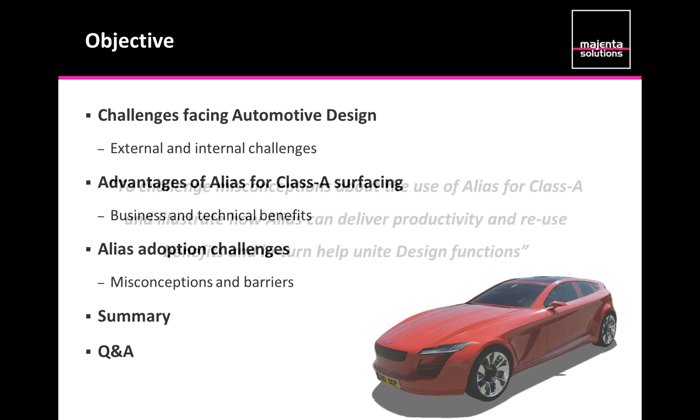So the agenda is going to cover some of the challenges we face in automotive design, both internal and external, and the advantages of using Alias for Class A, not just technical but business benefits as well. We'll also consider some challenges in adopting Alias for Class A, looking at misconceptions and potential barriers, then summarize and take questions. I have about 30 slides in total, and the presentation will last approximately 30 to 40 minutes.

So let's start with looking at these challenges that face design. The external challenges include, in terms of the marketplace, a rapidly expanding market. The BRIC countries bring with them a different challenge for design, the different voice of customer requirements that these marketplaces demand.

The customer is changing. They demand high quality niche products, and with that, with the need for an extended product range comes an increased demand for engineering to order.

And finally, the business itself is changing. Globalization has had a significant impact on automotive OEMs. We now have globally distributed teams with design functions placed worldwide on different time zones with different influences. So that's the external challenges facing design.

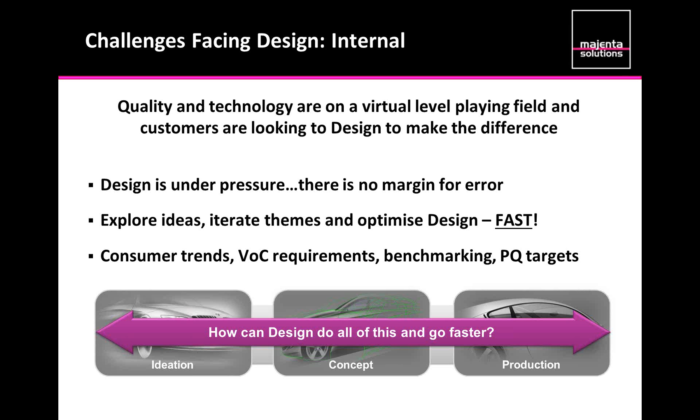Well, that's what we're going to look at over the course of the next few slides. So let's look at the current landscape in terms of CAD and visualization products that support the design development process.

The overall development process really can be divided into three key stages: the definition of the proportion and stance before a program starts, design finding or theme investigation during the conceptual phase, and through to the maturation of the design into production design and onto surface transfer or surface release.

Autodesk Alias is the de facto standard for concept design, and ICEM Surf is the legacy solution for Class A. In terms of the visualization pipeline, it's supported by products such as RTT DeltaGen, VRED, BunkSpeed, Showcase, Maya, and 3ds Max.

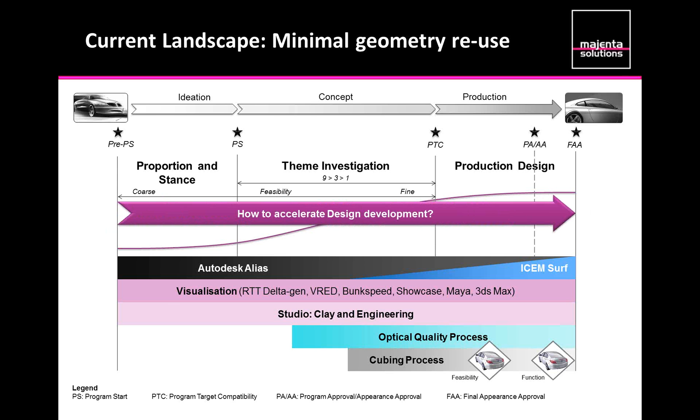So again, the question is, how can we accelerate this process? How would this look tomorrow if we were to utilize Autodesk products to deliver seamless design development? Well, as I'm going to pitch today in this presentation, we can actually use Alias for concept or creative design and production design, so we get a joined up solution for design surface modeling.

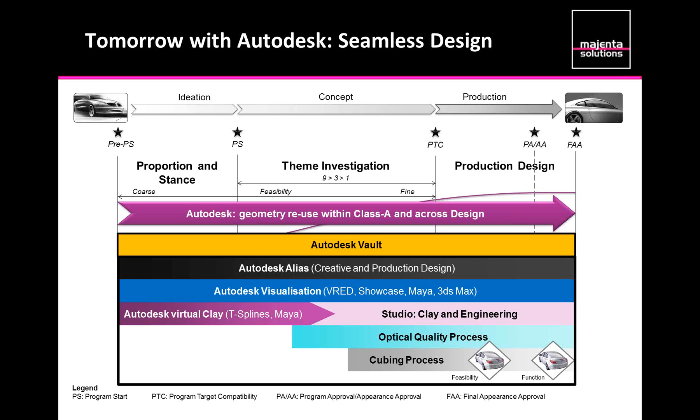Autodesk offers its new acquisition of VRED for a holistic visualization pipeline. In terms of supporting the studio, Autodesk has T-splines and Maya virtual clay tools, or subdivisional modeling tools. And all of the 2D and 3D visual assets generated during the design process can be captured using Autodesk Vault. All of that means we can help reuse geometry within Class A and across design to accelerate the process. So let's look at that in more detail.

So what are the business benefits of using Alias for Class A? Well, I think the primary business benefit is improved productivity, and we get that through being able to leverage geometry reuse within Class A. But how do we do that? What does Alias offer us to deliver geometry reuse?

At the heart of Alias, as I'm sure a lot of people on this call are aware, is the concept of construction history. Construction history in Alias enables us to make changes and see those changes propagate through our model, effectively enabling us to reuse geometry within the Alias part file. But whilst this is really well understood and pretty much accepted within the concept modeling domain, actually this is a revolution within the Class A market space.

Typically, Class A modelers, when presented with change, have to delete and recreate their geometry. These workflows are synonymous with the legacy ICEM solution.

Not only do we leverage construction history in Alias, but Autodesk have taken these repetitive, manual construction techniques and rolled them into automated tools such as Panel Gap, as you see here, which helps optimize and refine design very quickly. Not only does the construction history enable us to effectively replay those tools, it also means that if we make changes to the volume surfaces or the curves that define some of these automated tools, everything updates. So this brings improved productivity and efficiency.

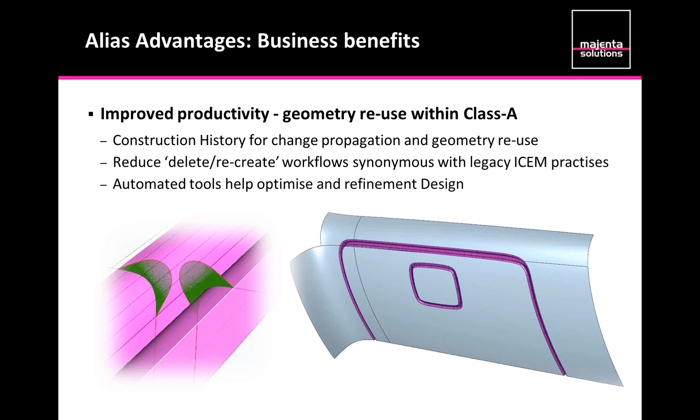If we were to consider using Alias for Class A, we then end up with a joined-up solution from concept through to production, enabling us to mature geometry from concept through to production. Again, this helps us remove or reduce this delete and recreate cycle, in this case between concept and production.

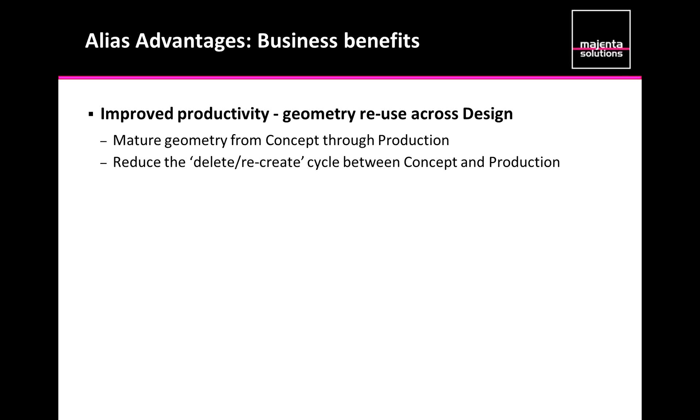Let's actually look at the market space as it exists today. For concept modeling, Autodesk is the de facto standard, and ICEM Surf is the legacy solution for production modeling. In both of these phases, because we're dealing with design, there's a lot of iteration. Change is synonymous with design.

The question is, if we were to move to Autodesk for production or Class A modeling, could we help join up these two functions and deliver seamless design development, and in turn reuse geometry to help accelerate the design development process? That's what I'm going to start looking at in more detail.

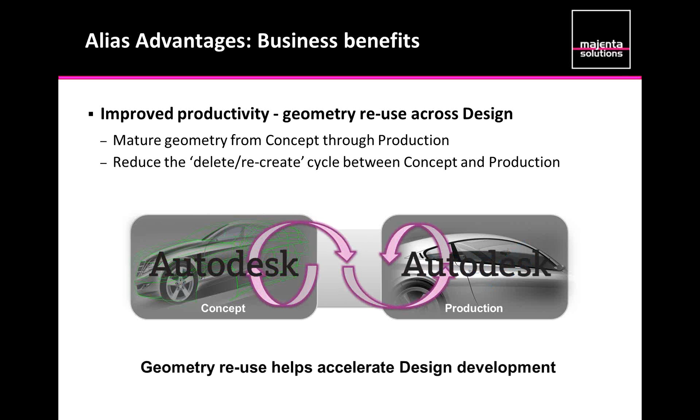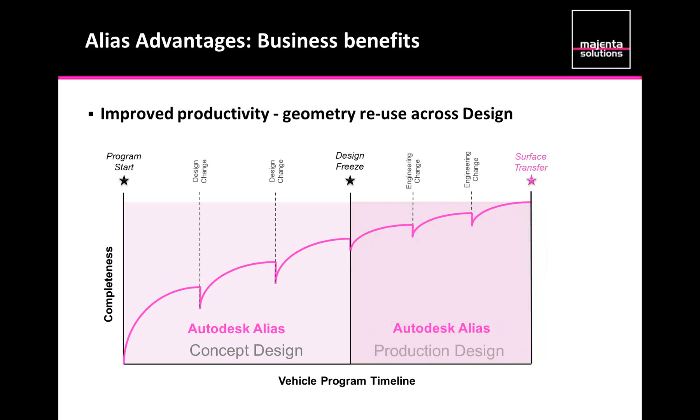But we still have a problem. We still don't get joined up design between concept and production, and that's evident in this graph. If, however, we consider using Alias for Class A, we then get a more joined up solution. The down spikes are reduced, and the vehicle program timeline can be accelerated further. So I'd like to substantiate this and actually look at what we mean by these different types of solutions.

So in terms of the business benefits, designers can easily communicate with digital sculptors if we use a joined up solution between concept and production design. There's no question that when a design moves from concept to production, the designer feels like they're losing control when the data moves to a tool that a designer is not familiar with. So if the designer can interact with the tool, and typically designers are very familiar with Alias, this helps them improve their communication and effectively preserve the design intent, which in turn accelerates the process.

Also, if we can leverage Alias across the design development program, what we end up with is effectively a resource pool that we can easily move around. It's flexible, and we can more easily manage program peaks and troughs.

Another challenge for managers in design is resource. As we know, the ICEM user base is actually diminishing. It's an aging user base. And Autodesk Alias, on the other hand, is very strong in terms of its resource capabilities. There's a whole pool of postgraduates leaving university every year with extensive Alias knowledge, hungry to be a part of the design process at automotive OEMs. And if we were to join up concept and production design and use a single system, with it comes reduced cost of ownership benefits, such as consolidating training and personnel costs, and also simplifying software maintenance and support.

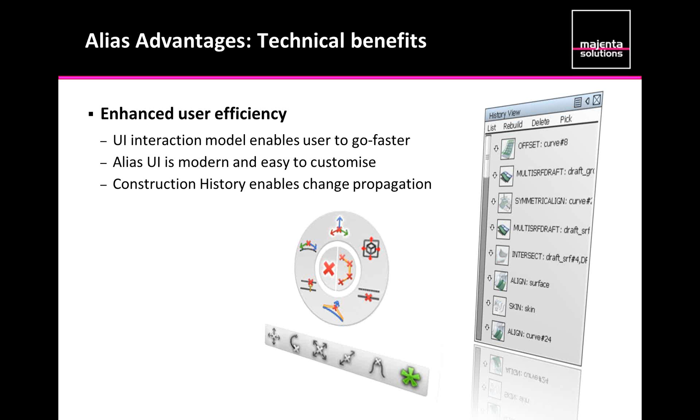So let's look in detail at the different types of systems that are out there and where Alias sits. I'm very conscious that these terminologies are used extensively in the industry: explicit modeling, feature-based modeling, constraint-based modeling. So let's look at how they sit with respect to the competitive landscape. So on the one hand, we have the legacy solution for Class A, ICEM Surf, which is an explicit modeler. ICEM is very good at what it does. It's almost exclusively Bezier in terms of the geometry it creates, but it has limited associativity. It's not really a constraint-based modeler, although you can, in Unified Modeler, apply some associativity.

I think the key advantage with ICEM Surf, and I've used ICEM Surf extensively for production surface modeling, is there is no question the high-quality Bezier algorithms are a real value add for ICEM Surf. But on the downside, some of the challenges are that actually managing change in ICEM Surf is time consuming, and we typically enter into these delete and recreate cycles.

It's often quicker just to delete geometry and recreate it than it is to try editing what's there. But that actually means we have limited geometry reuse capability in ICEM Surf. So on the other side of the coin are feature-based modelers, such as Dassault CATIA ICEM and Siemens NX Shape Studio. And these systems use something called linear timestamp history.

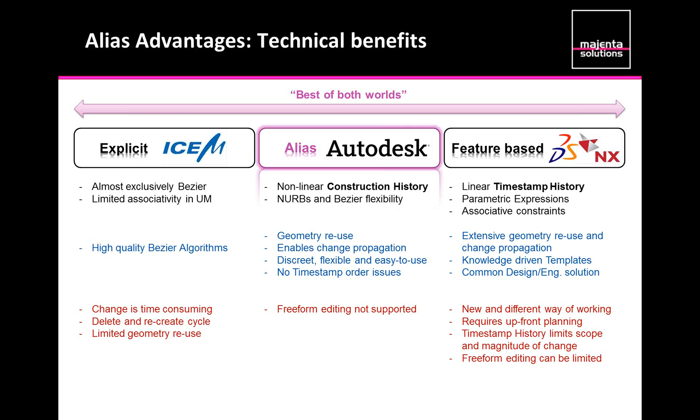So I think at this point we really should consider what we mean when I say the best of both worlds, Bezier and NURBS hybrid modeling. I think there's a lot of misconception about Alias with respect to NURBS and Bezier. So let's look at those two math types and what they mean to the geometry that we create. So Bezier is a very easy to control and predictable math. That's why it's very well suited to Class A modeling. However, on the downside, you often have to create multiple surfaces to capture complex forms, which means it can be slow.

NURBS, on the other hand, is really accurate and flexible and enables us to create complex forms fast because it effectively ties together the single segments of Bezier geometry into a multiple span solution. But on the downside, a challenge with NURBS is that it can be difficult to control and it can be unpredictable if the math becomes heavy. And I think this simple graph shows quite clearly the two key differences. Bezier on the one hand is easy to control, and NURBS, because of the flexibility, can be more difficult to control, but it is very flexible.

So what's actually the correct approach for Class A modeling in Alias? Well, I want to dispel myth number one. Alias creates Bezier geometry. And our approach for Class A is that we would use Bezier for the slabs or the blocks, for the surface transitions, for any blends and all gap conditions. In fact, everything that you model in Alias for Class A can be modeled in Bezier. Not only that, we give the user explicit control over the Bezier form, and that comes in the form of U and V control and also the degree.

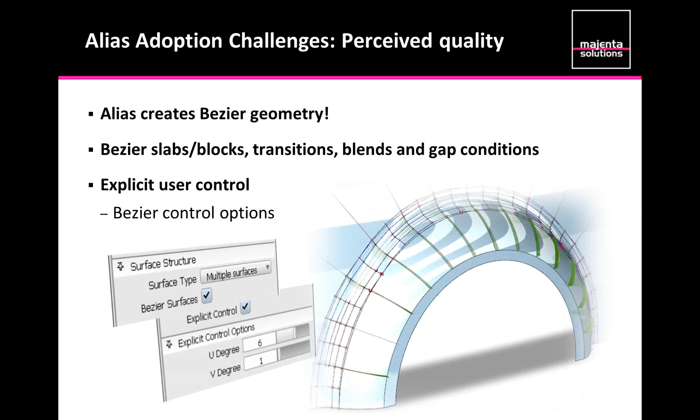But I would like to position to you a consideration for the use of NURBS in Class A. NURBS, and this is optional, NURBS could be used for design details, building on the Bezier quality from the blocks. For over 10 years, I've failed to understand why Class A surfacing modeling has failed to leverage NURBS for things like grey zone construction, where accuracy is paramount.

So NURBS is ideally suited for what I term auto-creation tools, or tools that really require minimal post-creation editing. Tools such as rolling ball radius, first flange and fillets, panel gaps, where accuracy is absolutely critical. This is an ideal application for NURBS.

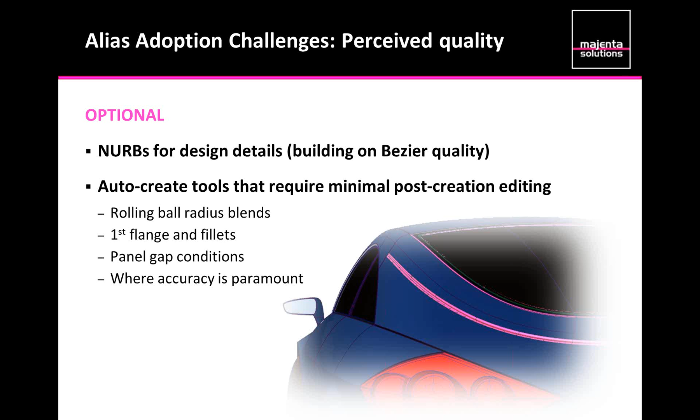Of course, the power with Alias with these tools is that because of construction history, if the user subsequently changed the volume surfaces or the curves that have been used to define these conditions, they will update. Anyway, let's look in detail at NURBS geometry and how the settings of NURBS impact or affect the surface quality.

As I've said, there is a huge misconception that NURBS doesn't create high-quality geometry. Well, actually, NURBS will give the user exactly what you ask of it. In this case, what appears to be a seemingly clean and smooth surface on a wheel arch eyebrow, if we actually put curvature needles on this surface to evaluate the quality, we can start to see that the graph is faceted, which is unacceptable for Class A.

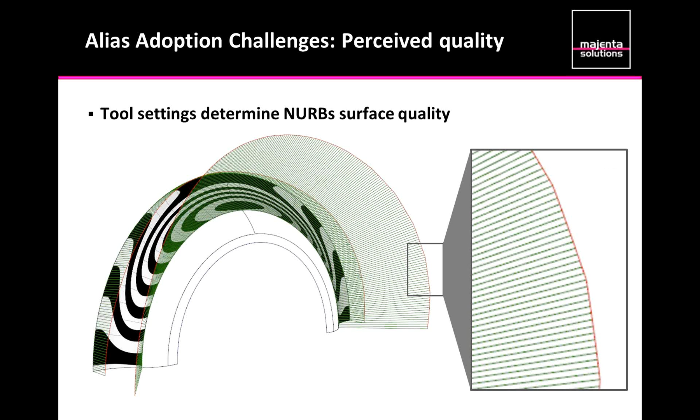However, this is exactly what I would expect with a NURBS surface generated as degree 3, because a degree 3 NURBS surface dictates that across the segments or the joins, the knots in this NURBS surface, we can only ever have curvature match, not curvature flow. So if we consider that same scenario using a degree 5 setting for NURBS, now the result can be completely clean and smooth across the boundary. And actually, Class A.

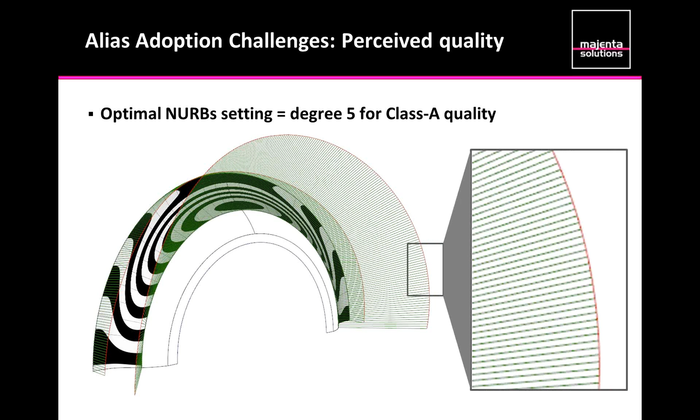So whilst we're tackling this issue of misconceptions, we cannot avoid the obvious question of the cultural challenges that we face deploying Alias into Class A. So let's look at the typical Alias users today in the industry. Alias is used for CAS modeling, or computer-aided styling, and a typical user persona for a CAS modeler is somebody who's creative and artistic. In fact, they usually come from an industrial design background.

They're industrial design educated. But importantly, the requirements of the CAS modeler are such that they really have to refine the design intent. They have to work with the designer and explore and iterate ideas. And they do still have some constraints. Of course, they have to satisfy studio engineering inputs, but they're very creative.

On the other side, in terms of Class A modeling with ICEM, the legacy solution, the Class A user looks and feels really quite different to a CAS modeler. In fact, by contrast, a Class A modeler is usually quite a precise and exacting persona. And often they come from a body engineering background or they're body engineering experts.

And the requirement on the Class A design is actually now to deliver the design intent. And this means not so much exploring, but more optimizing and refining the design. And they have to do that, importantly, with more constraints than the CAS modeler is used to having. This would include legal, manufacturing, and engineering criteria.

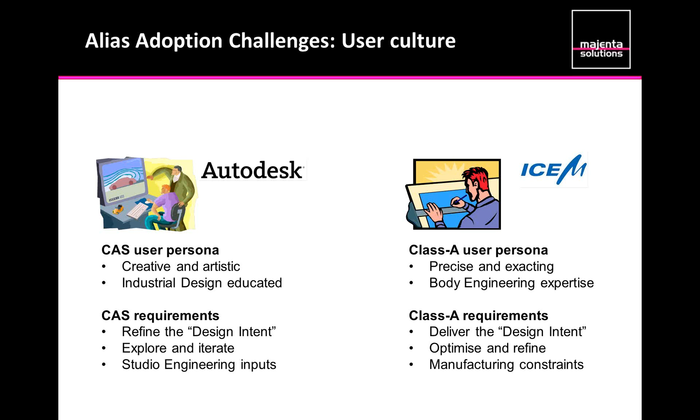And as we know, in the industry today, these two user profiles often have different perspectives, meaning that we kind of get this pseudo wall that exists within design between the two users. So the question I ask myself is, how can we break down this wall? How can we remove barriers within design?

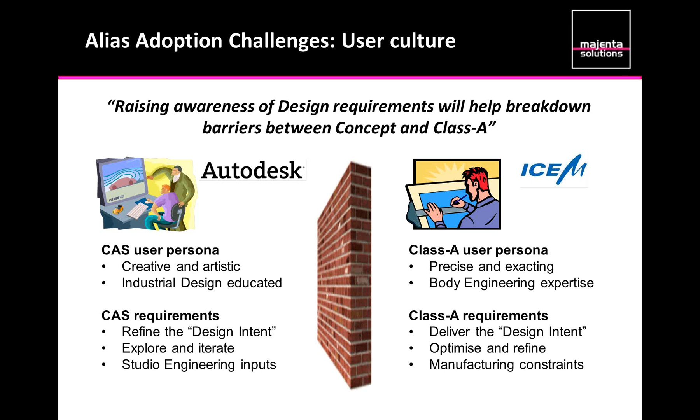And I think this can be achieved by raising awareness of the design requirements, the actual requirements that the users have, and also leveraging a tool that is joined up, that is seamless between concept and Class A. If we were to use Autodesk for Class A as well as concept, I think we can bring these two user personas together and have a more joined up, cohesive solution for design.

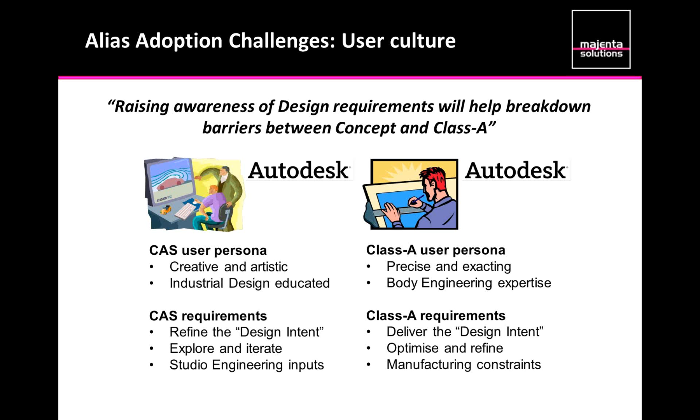So if we consider this now, what are actually some of the challenges in training Alias users from ICEM to Alias? Well, I think it's wholly reasonable that we should expect some resistance to change. In fact, as human beings, change is difficult, and a lot of the ICEM Surf users have been using the system for a long, long time. So it's wholly reasonable we should expect them to be resistant to change. But you know, there really is no worry here.

Alias uses industry standard freeform workflows. We're not reinventing the wheel. We can use the same processes that we do use today for freeform Class A modeling. And that's typically creating surfaces by 4 points, sectioning the geometry with reference to the underlying scan, editing hulls first, and then individual CVs to capture subtlety of form, increasing the degree and adding the flexibility to the surface, evaluating the surface for curvature and highlights, and then also finally editing to address any aesthetic and analytic requirements.

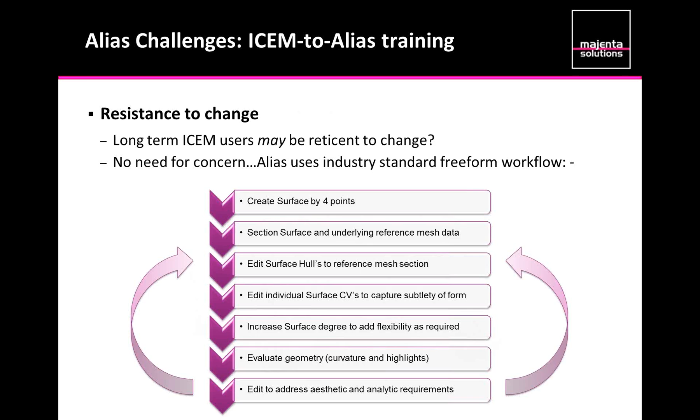And as we know, it's very iterative, so often it means reverting back in the process to where we started and going through this cyclical process. And exactly the same is true of Class A modeling in Alias. In fact, if we look at the bigger picture in terms of Alias surface development, the workflow is identical in Alias for Class A. Users typically start by creating the volume surfaces, adding the transition surfaces in terms of blends,

adding any details into the body, interior and exterior geometry, such as pockets and cutouts, and then finally blending the model, analyzing the model using real-time diagnostics, both for aesthetic and analytic analysis, and then finally trimming the model and sewing it all together before visualizing and validating it using tools such as Model Check to release to the wider enterprise.

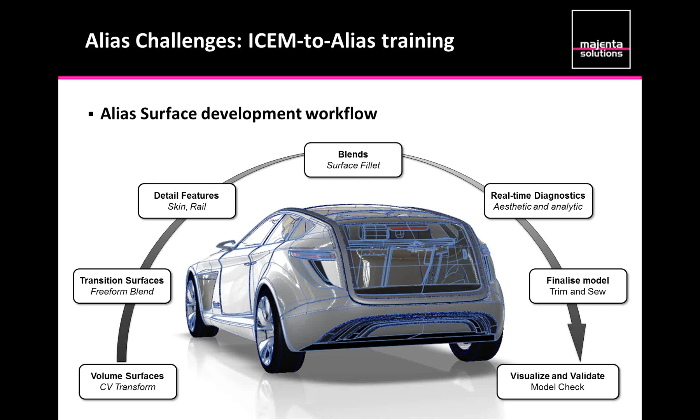So in terms of ICEM training, Magenta Solutions provide an ICEM-to-Alias conversion training. We actually have a proven solution that we've delivered at premium automotive OEMs in the UK. And we've actually just established an approach for ICEM-to-Alias conversion training that helps us ensure success for our customers. And at the root of this solution is the fact that all training should be supported by consultancy or at-elbow support. So Magenta's approach to training ICEM-to-Alias is to suggest an Alias Fundamentals training course, an ICEM-to-Alias course, in combination with advanced training and consultancy at-elbow support.